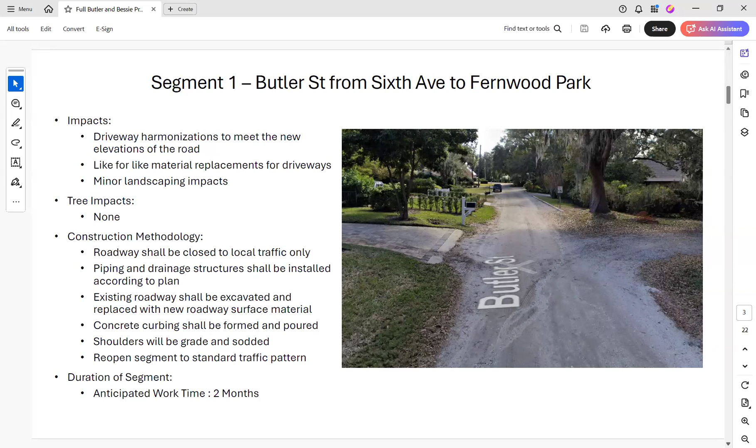So I'll turn it back over to you guys for the next slide. Thank you, Vashon. Now we'll move on to the next segment for the Butler project.

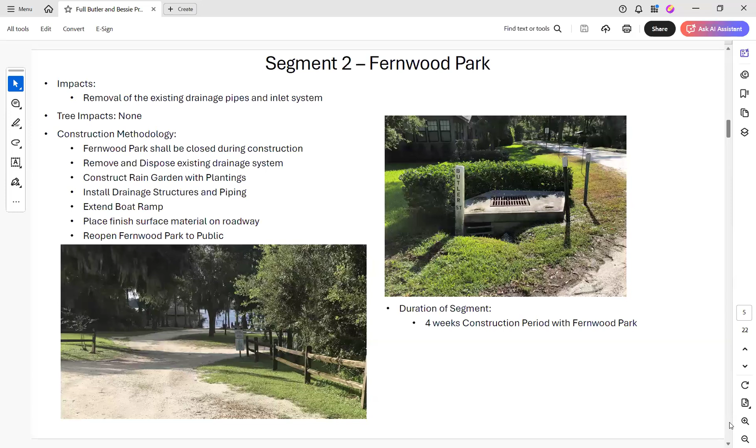Once again, the actual construction timing is about 4 weeks total. The majority of this time would be spent installing the drainage piping, grading the new gravel structure, and extending the boat ramp, at which point we'll reopen it to public and town usage, and return at the very end for final sodding and plantings in the rain garden. Thank you, Vishan.

So this will be segment 3, the final segment as part of the Butler project. This is on 7th Avenue, from Fernwood Park to Old Main Street. In a lot of ways it's similar to what we're doing over on Butler, from 6th to 7th. So we're going to do dirt road regrading within the existing footprint to achieve that 2% cross slope and allow the flow to the north.

There's going to be a short section of concrete shoulder gutter starting at about Forest Avenue and west of that, in order to collect that runoff and pipe it to the proposed swale. There's also going to be some adjacent sodding for the roadway. As we regrade the roadway, we'll also do some sodding for harmonization of those slopes. Then the swale on the north side is basically east of Forest Street, and some west of Forest Street as well.

We'll collect additional water before piping it to Fernwood Park Rain Garden. So all this is meant to collect the runoff from this area of the road and transport it to the west and eventually to the south into Fernwood Park.

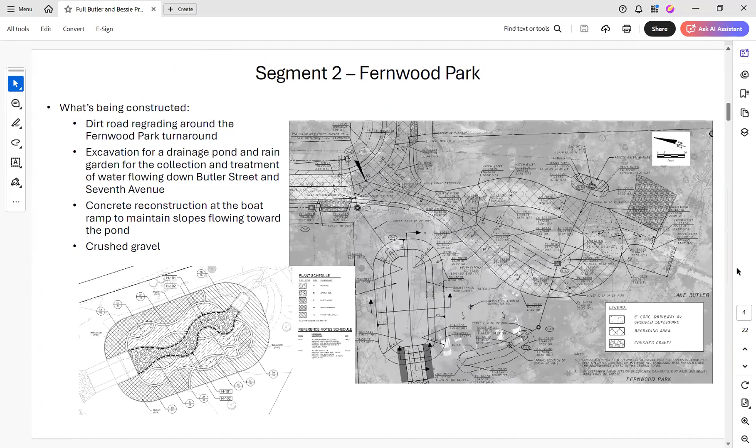That's all getting replaced through this to make it more efficient, through the plans. I think you'll have those intakes, and if you look at what Hal has back up on the screen, we're actually pitching the road differently and putting it to ditch bottom inlets with that V curb. If you get a chance, drive down by Molly's house on 10th Avenue, you'll see what we're doing.

Is that a comparable analysis to what you're doing? Yes, it is, because we're pitching the road in one direction and then catching it with curbing, the shoulder gutter. So yes, that is comparable.

And I think Anna Mae, I don't know if you can hear us or if you can talk, but if you drive down by 10th Avenue — I can hear you. Oh good, awesome, glad you're back on. Glad you figured it out.

So if you drive down by Molly and Bob's house, it's almost the exact same thing, and you can see what we've done. They're so ecstatic about what we've done down there because it really helped — we had a rainstorm come through and they love it. So that's kind of where we're at, and it's a catcher's mitt for you guys.

So you're pitching it to ultimately get it to Fernwood into that rain garden? That's the idea. But you're not laying pipe underneath to move it — it's going to flow down the road? Think of it as a catcher's mitt for you; it's going to collect in a gutter and shift it past your home, underground and topical, because we're taking the top water, putting it underground, then bringing it to the rain garden. But you're going to dig up the front of the yard and lay pipe to move water? Well, what we are going to do is dig up the front of the right of way.

Yes, I know, I hear you. And I love you, girl, like a sister.

So, John, Lisa, it's pitched to the east, correct? Towards us. Yes, and then it pitched to the west. It will drain under how it does now, but with a new system, it's going to drain into that rain garden.

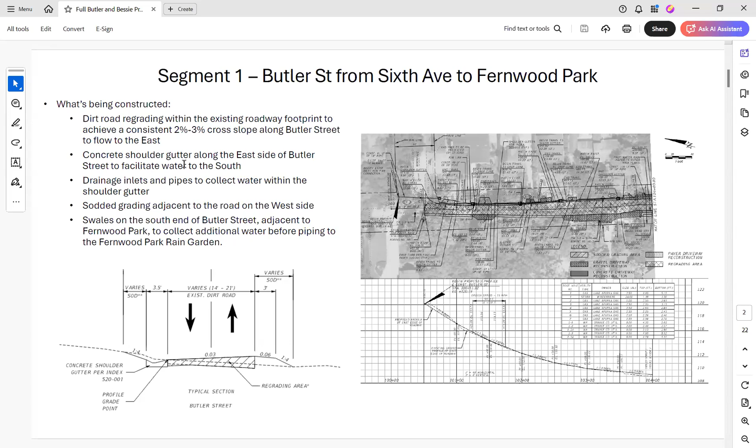So for Bessie Street, are you referring to the section of 8th Avenue running east-west, that curbing? Is that what you're referring to? Where are we looking exactly on Bessie Street? Oh, I'm not really sure, but I'm just meaning, is that the look of the curbing currently being done on Old Main Street, what I call Old Main Street between 9th and Chase Road?

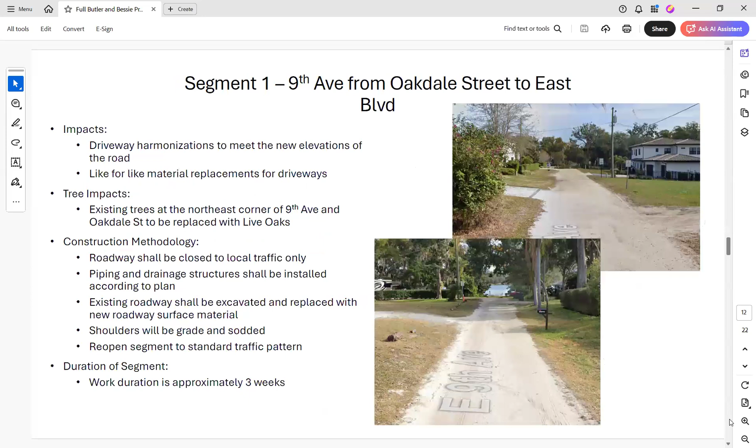Sure, so what's being done at Old Main Street is what's known as shoulder gutter. Shoulder gutter is kind of like a concrete valley where there's no face of curb or vertical curb - it's just a concrete channel that conveys runoff. So if you're looking at Old Main at 9th and 10th, that is shoulder gutter.

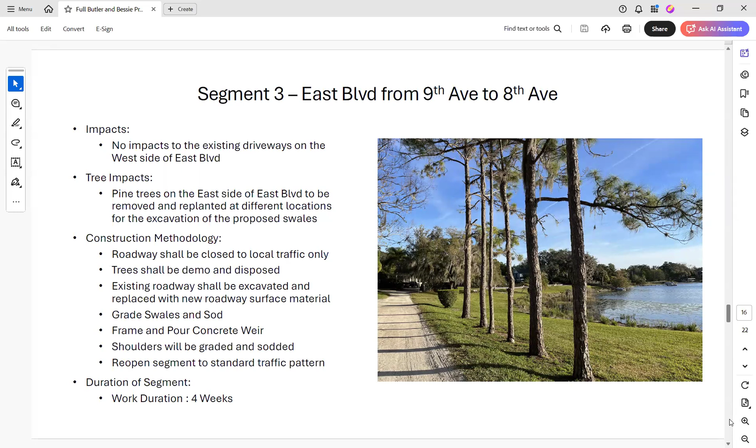For 8th Avenue, when we're running it along Lake Bessie, that is going to be type F curb and gutter, which is slightly different. Type F curb and gutter has that vertical face for the curbing, and we use that because of the proximity to the lake - we wanted to provide a little bit of a vertical element. So if you're talking about 8th going from east to where it wraps around Bessie, that would be the type F curb and gutter that you kind of see on the outside of roadways.

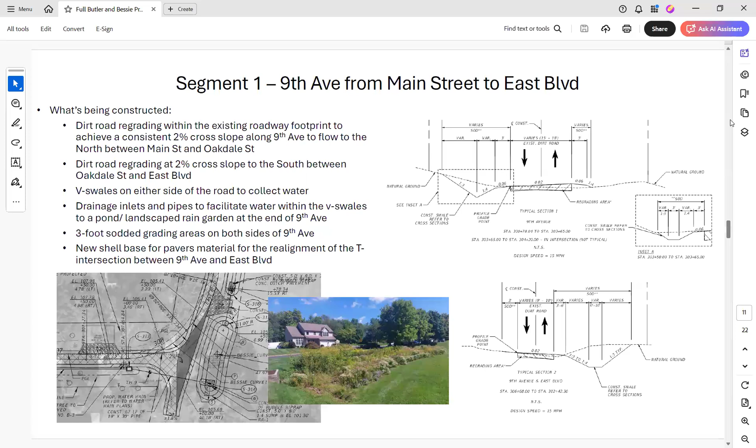Okay, thank you. I'm back to the timeline now - so you're going to start on the Butler section first, and let's say that was 6 weeks. So it'll be 6 weeks before you start on the east side of Main Street, or are they going to be running in tandem? I'll let Vashon expand, but if he's planning to do Butler first, if you wouldn't mind going through the Butler slides, Tanya, I think that was a couple of months for the entirety of the Butler project.

If I can interrupt, we can try to work on a Gantt chart for everybody with a time frame - it's a ballpark of when things happen. That's the simple time question, and the phases as well.

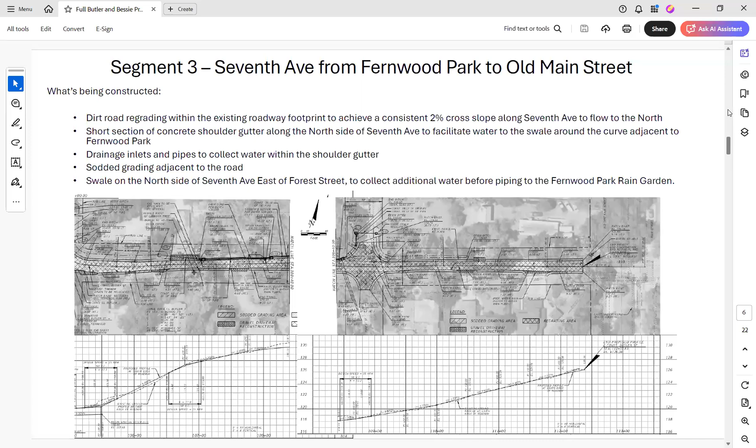But yes, if Vashon is planning to work on the Butler project first, it's going to be a few months before he gets over to Bessie, I believe, because looking at the construction duration, it was a couple of months for west of Fernwood, a couple of months for east of Fernwood Park, and then 4 weeks for Fernwood Park. So I think the schedule roughly was like 4 or 5 months - he may not get to Bessie until after that. But Vashon, definitely chime in as well, because you're going to be doing that schedule directly for the construction.

Okay. Question about the staging - is some of the staging still going to be down at Lake Bessie? And if it is, can we put it so that it is in front of the lot and not so intrusive?

Vacant lot, she means, I assume.

John, I know you'd already thought about laydown for both these projects. Can you explain that process and your thoughts on it? I'll work with you on that, but at the end of the day, I want to make sure it's the most convenient for our contractor, because we do have areas for laydown. The sooner we can get them in and out, the better it is for all of us. So the more convenient the laydown area is, the better it is for everyone.

And you'll be sharing that with us then? Absolutely, once I get with Sean. This is early on in the project, thank God we're doing a pre-con. Yep, it'll probably be closer to the boat ramp than anywhere else. We'll figure that out, but we do need a laydown yard to make it efficient for our contractor.

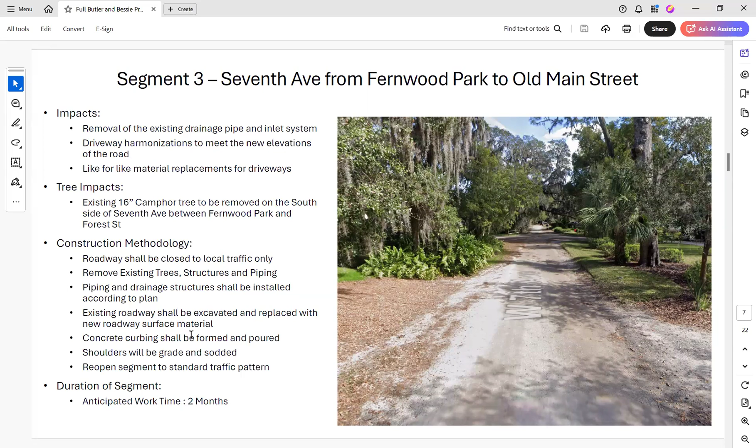Can I interrupt you real quick? Construction's ugly, it's not going to be fun. I'm just letting you know we got so many complaints on West 2nd Avenue because of the look, the feel, and the digging and digging. So it's not going to look pretty for quite some time, but once it's complete, we'll make sure everything is refurbished and looks better than it does right now.

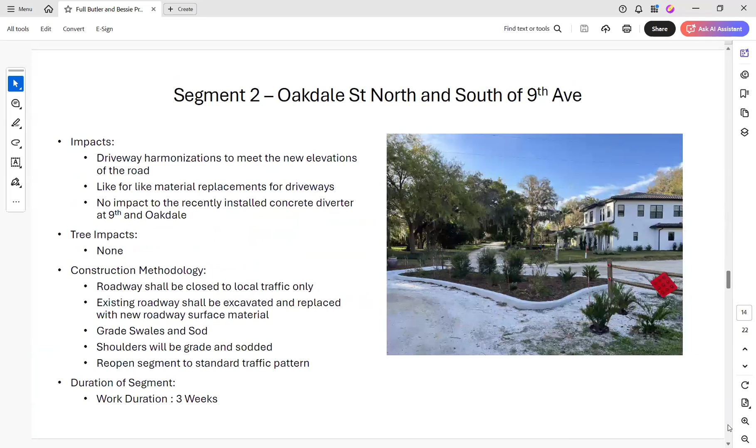Thank you, appreciate it. The East Boulevard swales, will some of that water be going to the 8th Avenue rain garden and some to the 9th Avenue rain garden? Or are they just holding water up high?

So those swales that we have are going to be going to both. Some of the water is going to the rain garden to the south, and some is going to the rain garden to the north as well. There's also a portion of the swale where you'll see a concrete weir, and during certain storm events it will overtop onto that weir. But in general, it would be going to both rain gardens, depending on if you're talking about the south side or the north side of East Boulevard.

Okay, and last question. Tanya had mentioned not anything has really changed, and that's true, except the level of our road has deteriorated. I just want to make sure our driveway is going to be usable when this project is over, because right now we can't even get into our driveway.

So I can answer that. Yes, the road has likely been eroding over a period of time. Like Tanya mentioned, it's been a process to get approval to move forward with construction. So they're going to build the grades based on the plans, which is where your dirt road was a few years ago, and yes, they're going to be filling in areas as needed to provide you with a smoother slope into your driveway. Thank you.

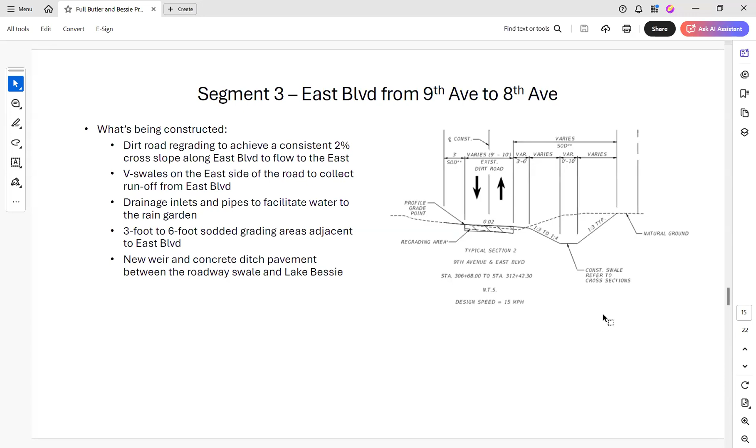Mr. Scott Ross? Hey everyone, thank you. So whoever's in charge of the slides, if you go down to segment 6, I'm at the corner of 3rd and Magnolia, and you can almost see where my question is going in one of the pictures. Okay, we can do it from this one, the overhead.

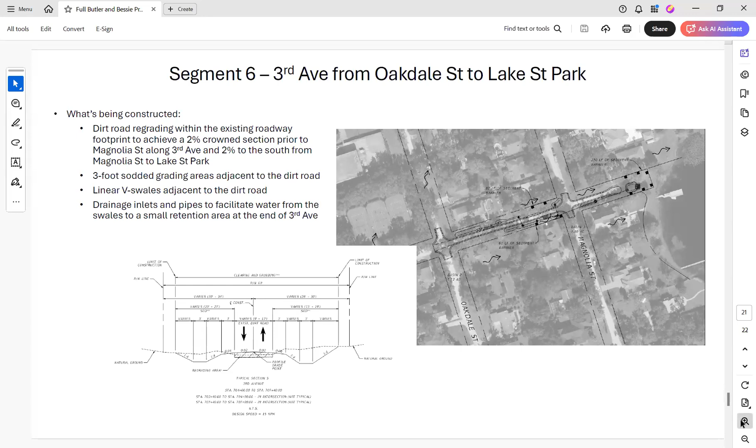So the white dock that you're looking at is ours on the lake, so we're right down by where this drainage is going to be. What I can't tell from the picture is, if you're looking at 3rd, is most of this going to be on the north side or the south side? So our side or the Hartog side? Oh, there we go, yep, that helps. So this looks like...

So if you're looking on 3rd Avenue, west of Magnolia, we have proposed swales on both sides, and you can kind of see the line work for the swales in the drawing right there. East of Magnolia, we're providing a proposed swale on the south side, and that pipes into that spreader swale, which is that rectangular shape, meant to hold some of the water so it doesn't flush out too quickly like it is right now.

Okay, so my question is, you can't really see because of the trees, but we have a 2-car driveway right there. My concern is that like-for-like is going to result in a ditch before our driveway. The property to the north of us also has some drainage, and they have a concrete sort of little overpass with corrugated metal for the water to flow through. So have you guys put thought into that section right there?

So if you're the property on the south side, east of Magnolia, on the southeast corner right there? Correct, yeah, the white boat dock is ours. Well, gotcha.

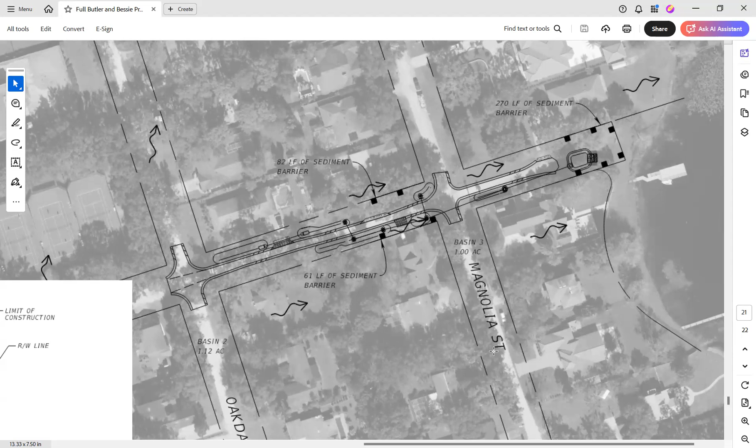I think the intent of this design is to keep everything on the right of way so it doesn't go south to your property, and then gets it into that pond that we've shown in the park, if that makes sense. Because I have the same thing working with your neighbor to the north.

Yeah, the Hartogs, yep. And so that was part of my meeting with them and meeting with you. I think I met you a couple of years ago, just trying to figure this thing out.

And so the idea is that anything coming out of those black lines isn't coming into your property anymore. We're directing it all to the park with an overflow that treats it, and then it overflows to the lake treated through conveyance.

No, that makes complete sense. What I'm wondering is, what are the lines? Or if the lines are new swales and ditches, then that's going to be in between 3rd Avenue and our driveway.

I think of it as a catcher's mitt, all within the right of way. I think he's worried about his access on his driveway apron with those swales.

I think the design covers that, because there's a pipe - if you can put your mouse on it, it's a pipe under your driveway right there. And then that allows you access, but yet conveyance beyond your driveway.

Okay, so that's the idea. That's the intent through that design. So is it going to be grass over it or concrete? How are you overlaying it? Because like for like would mean something completely different.

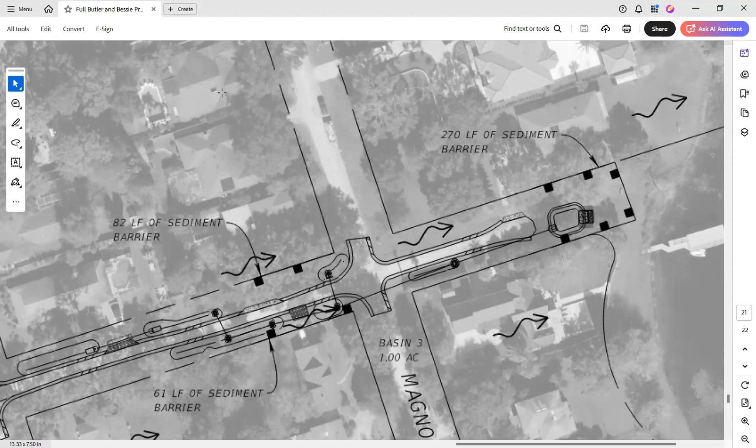Okay, yep. I think it's important, if you zoom in Scott, you'll see where the swale ends just to the west of your driveway. That's where a structure is placed.

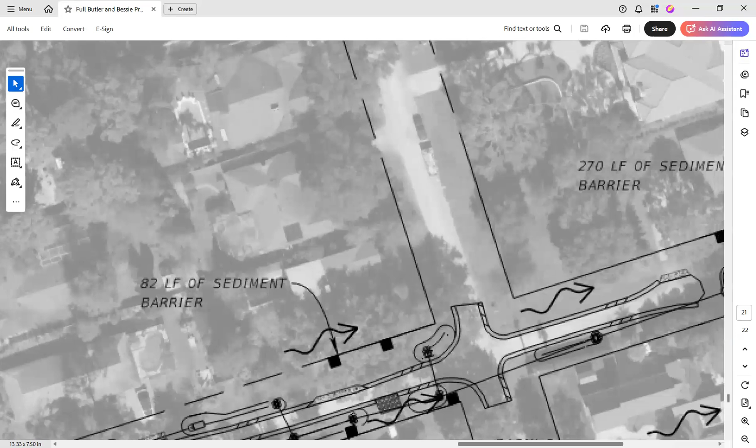And then your driveway is maintained, a pipe goes underneath your driveway to the pond. So your driveway will be reestablished, so you still have access.

Okay, the swale is to the west of your driveway. Does that make sense? It does. Okay, great, can you zoom in on that, Hal?

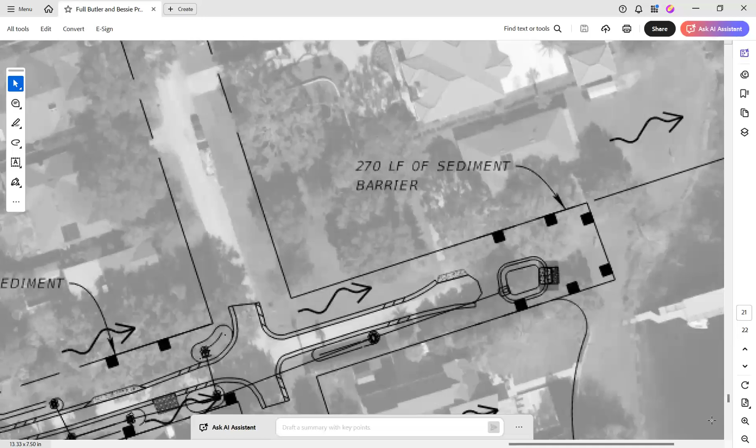Tanya's controlling it, but I think that was what I was just gonna add, John and Scott - you see the swale, but the intent is for the swale to end prior to your driveway, and we will slope back up to your driveway and match like in kind material.

And the pipe that you see running will be underneath, subsurface. So that inlet will capture all of the runoff within that swale on the south side of your driveway, and it will end before your driveway and slope up to it so your driveway won't be in a ditch or swale area. It's actually on the west side of his driveway. West side, correct. Okay, thanks guys.

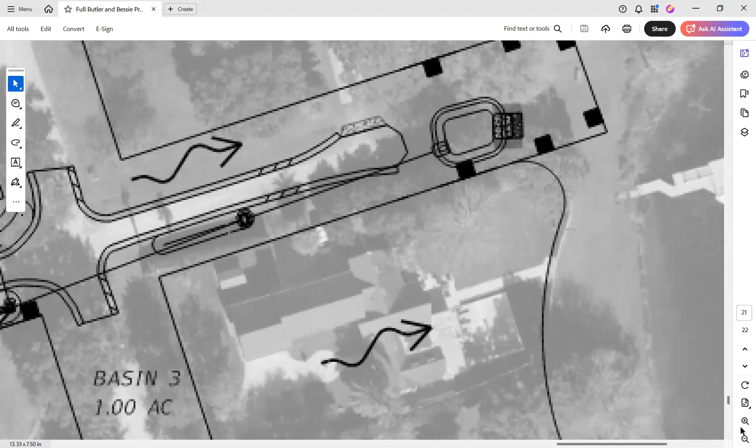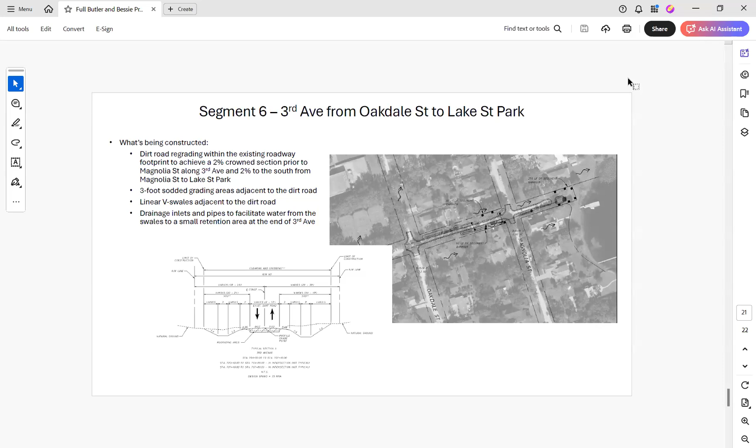Great, thank you so much for having this meeting. Gina and I have a lot of trust in the town because of how you've responded for us before, and a lot of trust in these experts on the call because it really sounds like when a homeowner has an issue, even a tricky one, you're going to work it out and make sure we get what we need. The person who knows my property, we're at 9th and Oakdale, the White House. 9th and Oakdale is a safe spot for our property.

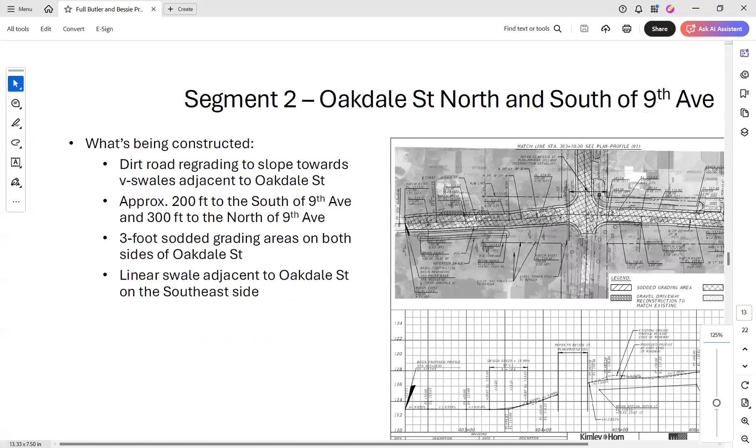For us, the real threat is just to the west of our driveway on Oakdale. John and Tanya will remember we were granted permission to build a concrete ribbon in front of our driveway, and when you tilted 9th Avenue towards the north, we've had no flooding issues since. But for anyone wondering why I sound nervous, it's because we flooded three weeks after we moved in, and it was pretty bad.

John, you know the property pretty well — assuming you're still on the call, are you expecting that the concrete ribbon will be removed? Or is that possible, to the south? No, actually, Peter, that's quite frankly part of the design.

Because the road pitch, based on our design, is pretty consistent with how we graded everything. But we will have improvements in how we flow and convey the water through the pipes and everything else. It'll be a huge improvement for you because we're opening up the dike, if you will, beyond your home. So it's very consistent with what you and I talked about, and what we've discussed for the future. Does that make sense? So you're saying the ribbon will stay? Yes, absolutely, that's part of the design to keep that ribbon.

Okay, and then we're dealing with the flow down the other side on Oakdale. So part of that design, working with Hal and Victor and everybody else, was to understand what we had in the past, the problems, and solve it even better, because we're not going to rely on the small infrastructure we have now — we're going to have the right stuff coming in to take even more water.

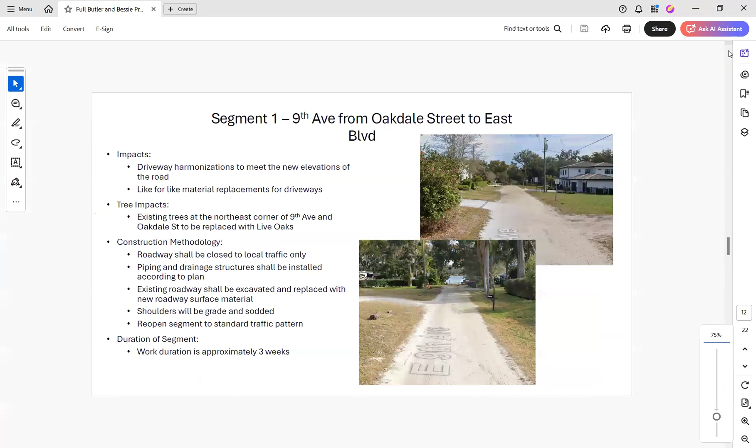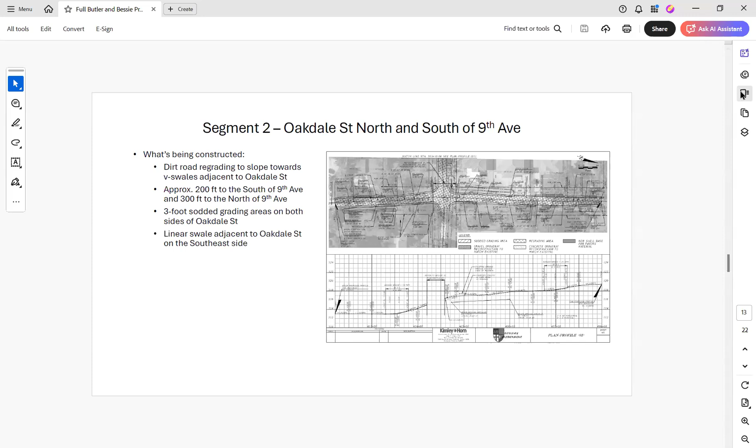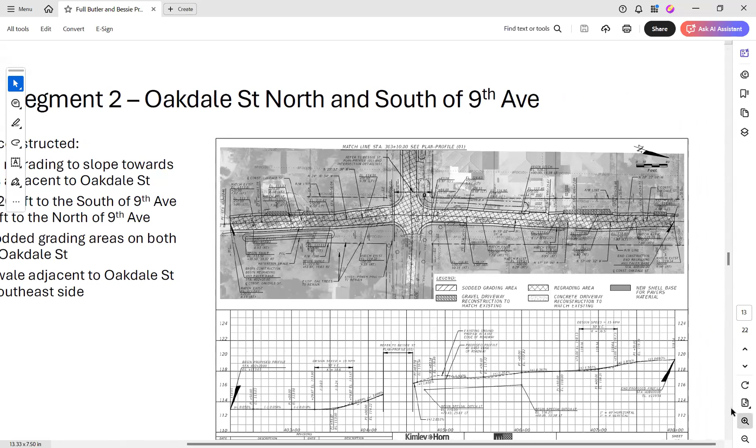If we're purely looking at the area along 9th Avenue from East Boulevard to Oakdale, we're actually making very minimal improvements, because there's already a ditch there to some degree on the north side. Looking at the plan sheet, we're pitching everything to the north where there are some existing swales through that area. But we are providing a side drain to convey the runoff across the driveway on the north side.

If you continue to pitch the water to the north side, Hal, you will be my hero. That's our intent.

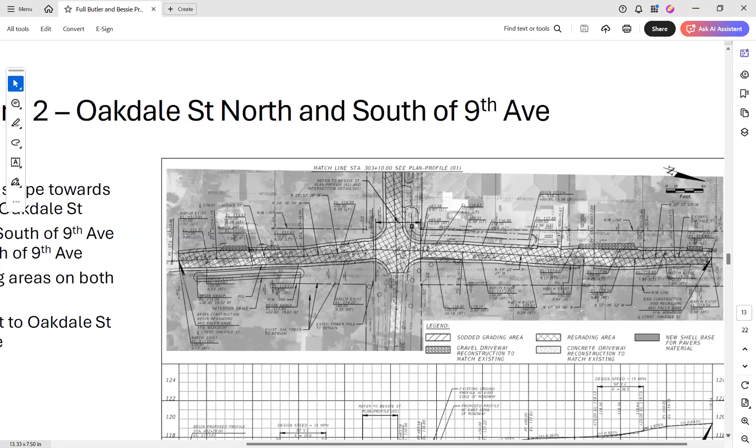Although I appreciate it, it's not my intent to be anybody's hero, but we were matching existing drainage patterns to the extent feasible. Right now there are existing swales on the north side, so we're cleaning those up a little, but basically matching the existing road profile through there, because the road is relatively flat longitudinally there—you don't have the steep drop-offs like closer to the lake. So we're just regrading the roadway slightly, pitching it north because of the existing swale systems, and cleaning those swales up a bit. I hope that helps.

It absolutely does. Gina is here too, and we both thank you guys for answering our questions and for all of your hard work. Thank you, appreciate it.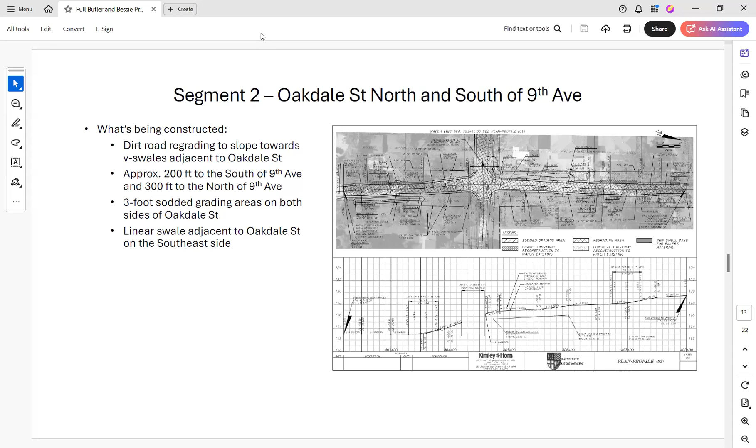I am in awe. I do not see any more hands raised, Robert. Oh, nope, one more came. Is it my turn? Is that right? Yeah, yes sir, hey, nice meeting. I want to talk about segment 5. There's a couple of questions. I understand there is no work on Bessie Street between the corner of East, or between 8th and Bessie and 7th and Bessie. Is that correct? Hal?

So for segment 5, we stop our work at 7th. There's no work north of 7th. There's no work south of 7th on Bessie Street. Is that correct?

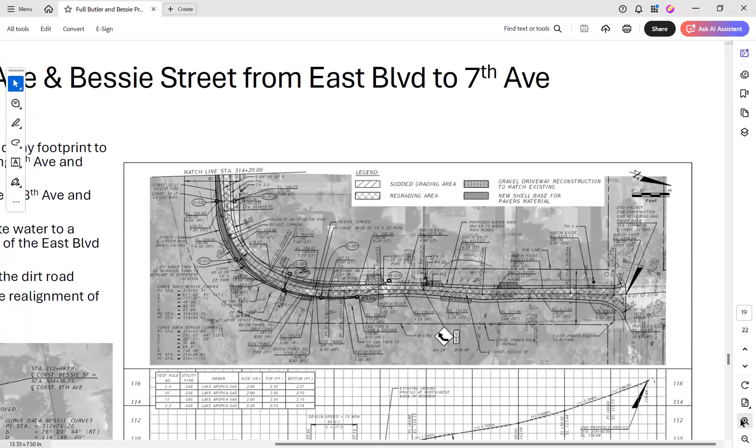Can you describe the work happening between the curve of 8th and 7th on Bessie Street? Yep, that's the work south of 7th. What's going on with that curve is we had to shift the road slightly to the south and east. You can see that area in the gray shape that says new shell base for pavers material, because we had to get the road into the existing right-of-way.

We're redoing that type F curb and gutter to provide the inlets and the proper cross slope to drain to those inlets. Once you get past the curve heading north, it returns to an open system where we just have sodded grass on both sides, maintaining the existing flows through there.

We're also going through the areas marked gravel driveway reconstruction to match existing. Through that area, we're regrading the road to primarily drain to the east, where it's going now, and we'll harmonize the driveways through there. So the work between the Bessie curve and 7th Avenue is mainly dirt road regrading and driveway harmonization.

But is there curbs added? There is curbing along the curve only. So north of the curve, that just stays the same and you're just grading? Correct.

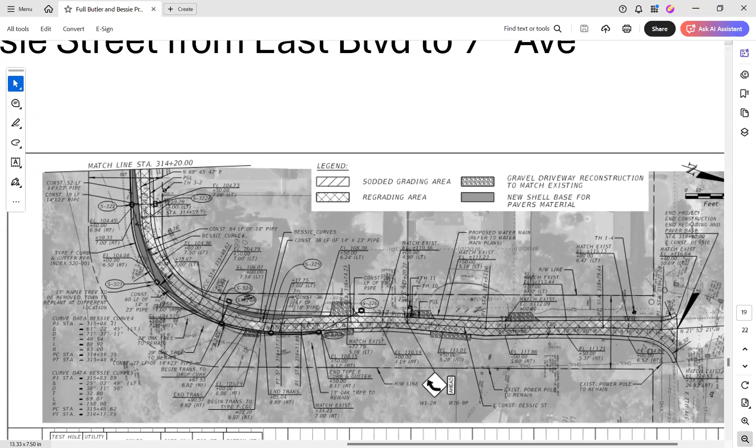Next question: you are demoing the existing piping on 8th Avenue, and from 8th Avenue east where there's a retention pond, you're putting in a new rain garden, redoing that retention pond area. Is that correct? That is correct.

My concern originally was that when they last did that, the outfall from the retention area is higher than the curb on the corner of Bessie and 8th. So that retention pond never really got full, it actually outfalled over there on the corner, because as soon as it got high enough, that lower area on the curb would overflow. So that'll all be corrected, is that my assumption? Is that correct?

Yes, any elevation deficiencies previous to this project will be corrected within that stormwater retention area, where we're going to prepare a rain garden. The curb and gutter system around the curve return is going to be piped into the newly regraded area, so the elevations will work from a drainage standpoint as part of this project.

So you guys are going to pay attention to your surveying so the water keeps flowing that way. Last time, as soon as that retention area got to a certain point, it spilled out on the corner through the inlet because of the particular grading that was installed. Okay, so that's an answer.